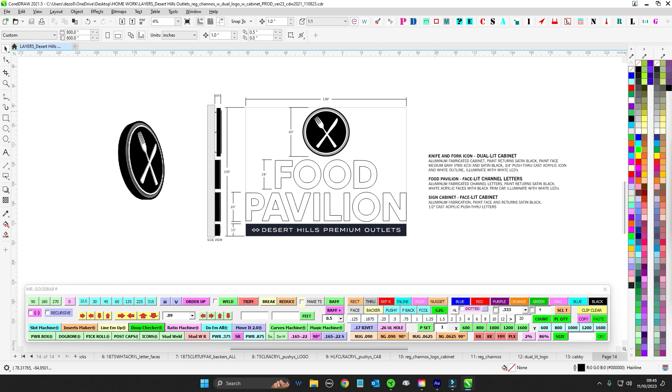Anyway, so this is for the Desert Hills Premium Outlet. This is for the Food Pavilion. They're taking down an old sign, putting up the new fresh. Old bust is out. New fresh hotness is in. So mostly I just want to go over this logo. It's got some weird processes to it, but nothing we can't handle. So let's get after it.

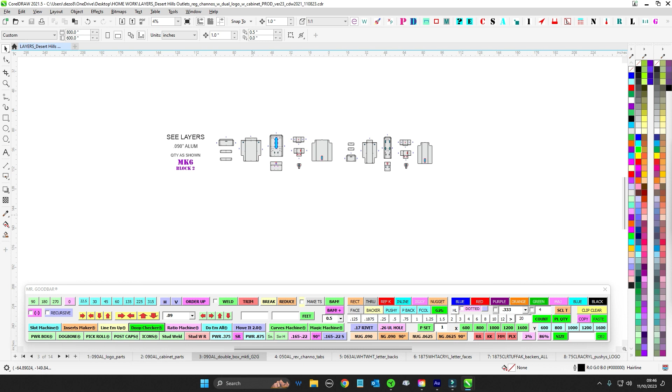So this is the lay of the land. I broke it up all 090 for the logo part. We've got double box pushy cabinet. Got all the parts there. Got a couple power vaults. Don't know how much it's going to take. We've got ourselves some custom size, weird size tabs for the logo. We've got regular channel letters coming in. So there's some 063 white and 3/16 white faces coming in.

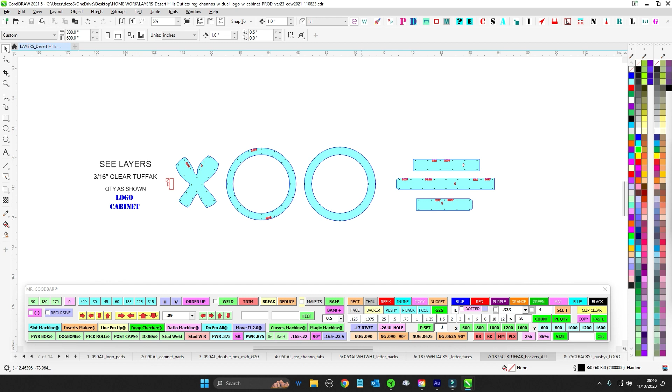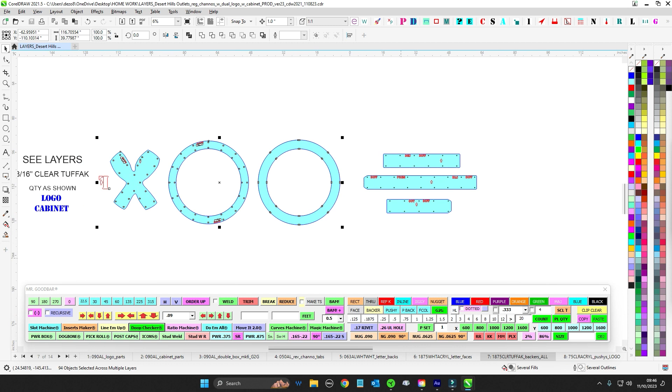I did do 3/16 clear Tuffak on all of it. So don't be like, oh, we don't normally do it that way. We do have a sort of reverse channel 3/16 thing here. Plus you'll see that the backer here sort of holds the logo together. So I wanted that strength. So this is for the logo. So since we already had 3/16 up on the table, might as well just do the cabinet as well. So yes, it is 3/16, not the usual 1/8 that we do for backers. So there's a reason why.

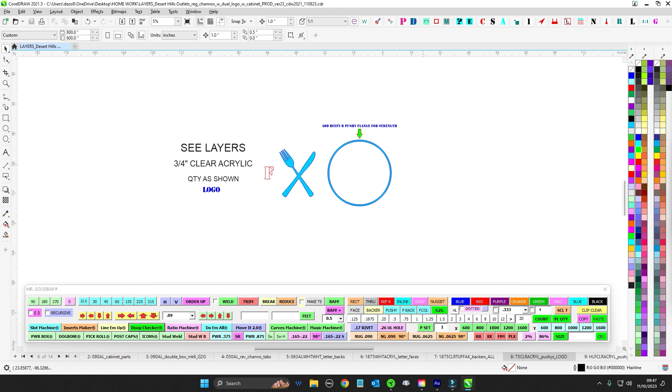And this is why, because it's going to be one big giant push through compromised face. So keep an eye out for this. You got 3/16 or 3/4 acrylic here. I'm telling Route, I want this to be a little bit beefier flange, thicker maybe, wider, all of that. And then we got 1/2 inch push throughs for the cabinet. So it's how we do. Got our pattern, all that.

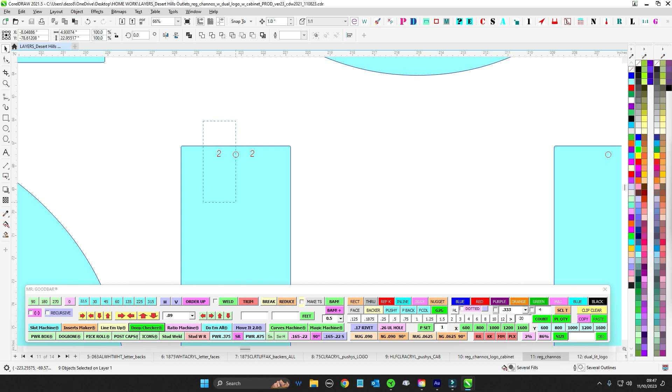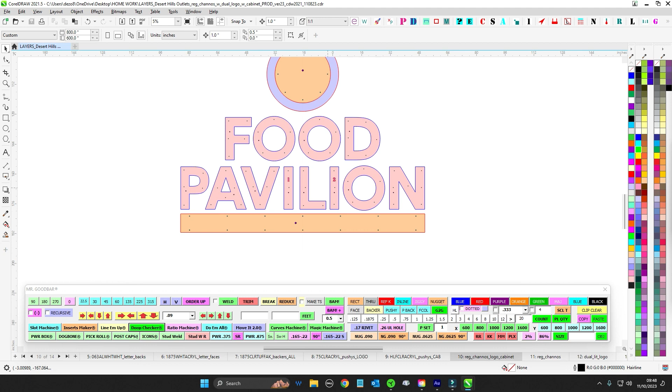Install, I encourage you to be paying attention. If you could pass this on to install, so when they go out there, they don't go, oh, this doesn't fit. So there is a number 1 and a number 2. I also did bring that along to the pattern. So when they see that at install, pay attention for number 1 and number 2. So keep that in mind. Otherwise, these are just going to be 5-inch off the coil. Pretty straightforward. Thank goodness there's no serifs.

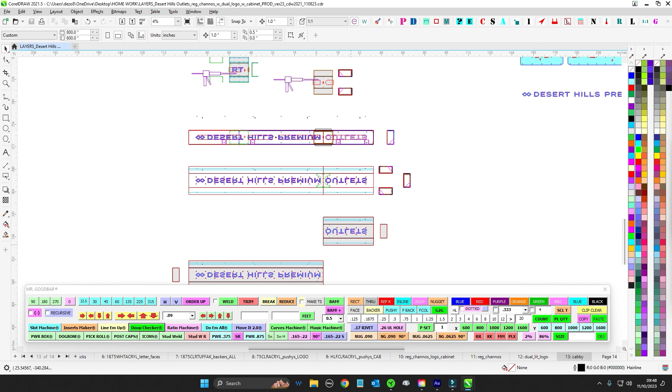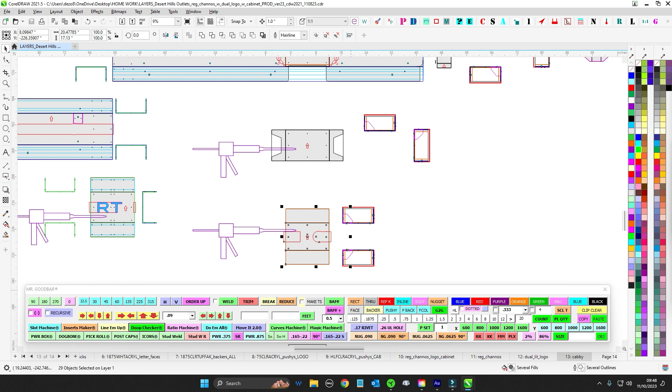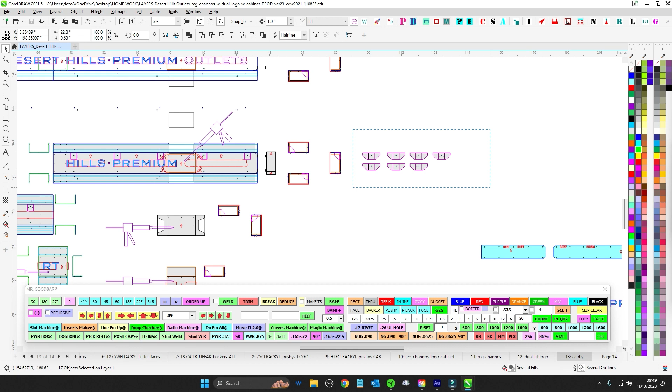I did remember to send you the wings this time. The gussets are there and they just go across the top. This thing's only 10 inches tall, so it's not that big a deal. It's just longer than we'd usually like to do it because that way it fits in the brake better. But anyway, so nothing crazy there. So you got your letters, you got your cabinet. So let's get after this logo.

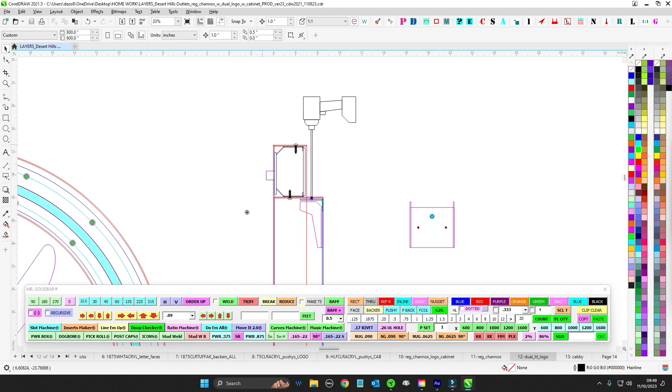So the logo is dual lit. It's going to be too big and heavy with the push through and all that, and too compromised to just be relying on a polycarbonate backer. So I went ahead and made it a sort of aluminum cabinet with the outer ring suspended. So that's why I just wanted to point that out to you.

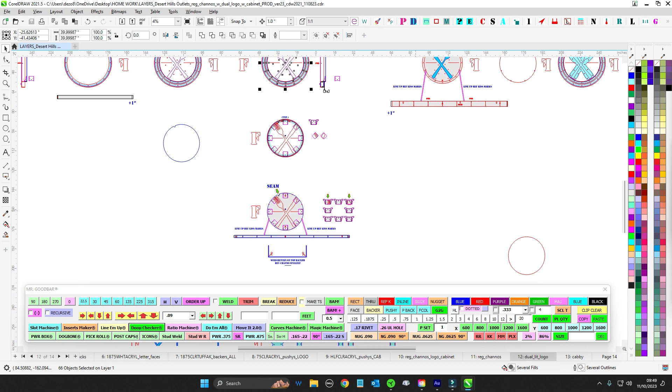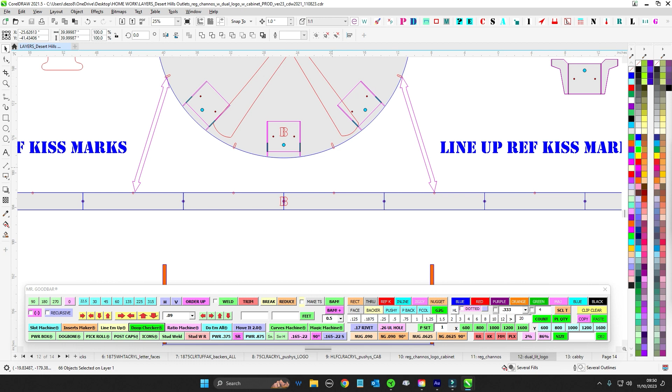We've done this before, but I have reference notches, and we want to make sure things get done in the proper order so everything lines up, because I already have your mounting holes all set up. So if this goes together like I'm planning, though no plan survives contact with the enemy, so we'll see what happens. So you start with your backer, go ahead and just run this through the slip roll, get your curl going. If you take the little reference marks and make sure that they line up with the appropriate ones, so the B is the bottom, then all of your mounting holes will already be lined up.

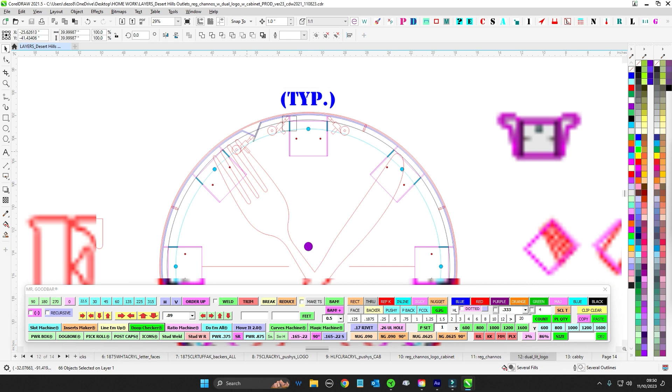And you want to start to where you got your top over here, and then you make your seam notch here like we do. So I've got a long boy and a short boy here that will overlap like this, and then you can go ahead and throw a quick weld right in there and burn it shut. So that'll be the part that goes to the wall that's ready to receive.

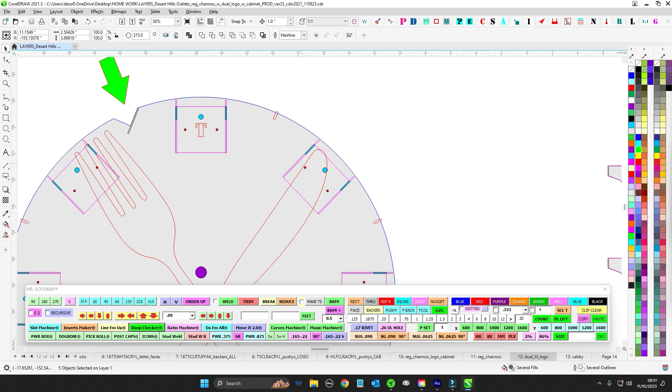And then I have the different gussets, and I went ahead and even put a little reference kiss for the fork to complete. You will have to 4x the LEDs up on there and make sure that you get an LED right here so there's not too much shadow coming out. And you'll have to put an LED up in the gusset there. But I have those right there for you just to remind you that you got to extend them.

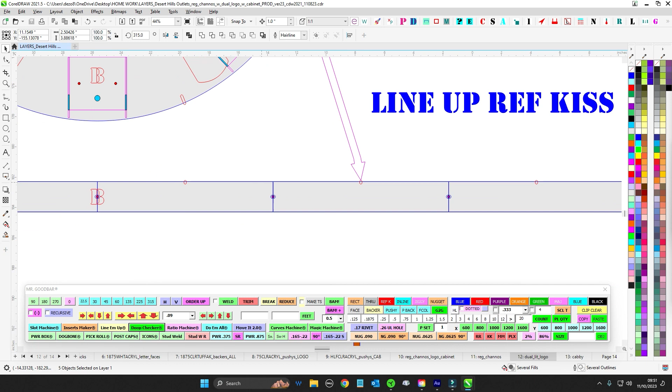These right here are just reference lines to get level for install, just to make sure that's leveled off. So you're just going to go ahead and burn that around, burn these gussets in, and then these gussets are clearanced in order to touch appropriately. They'll touch the return there, and then you can just burn those right to that, just like that. So you would just work your way around. So that way this ring is going to be nice and strong. It's got lots of strength. That way it's all good to go.

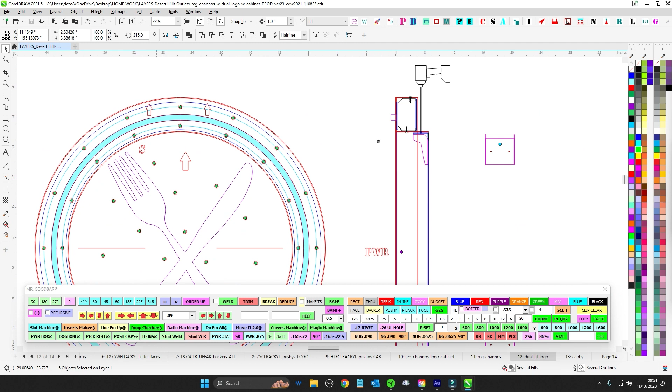Then you'll go ahead and make the actual face part. So this one's super funky because, again, it has this push through 3/4 ring that just cuts everything in half. So there's no structure. So that's always fun. So you'll have your main body here. So what you're going to do is, you've done this before, you'll just get your full return, go ahead and run it through the slip roll, and then push it to the outside of the scribe.

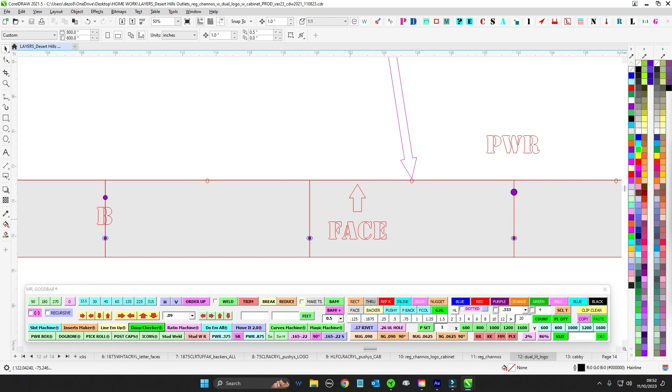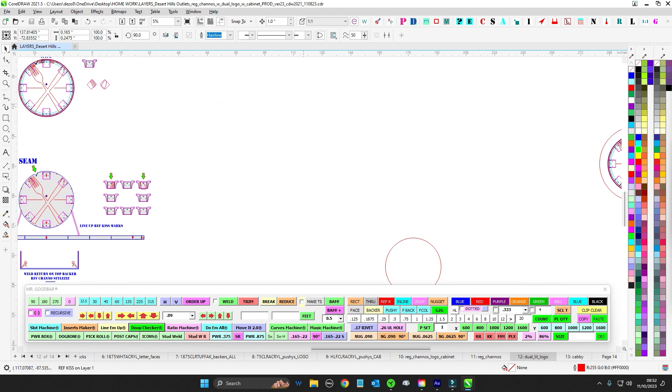And then same thing, make sure you get your bottom lined up with the bottom, and then work your way around. And these little reference kisses, make sure that they line up with these reference kisses. And then your mounting holes will all be taken care of. And then you're going to bring it around and make sure where the S is here at your 1 o'clock, or 11 o'clock, depending on which way it's flipped. That's where you're going to put your seam. And then that way it'll clearance that notch there when you slide it together. So it should be all good.

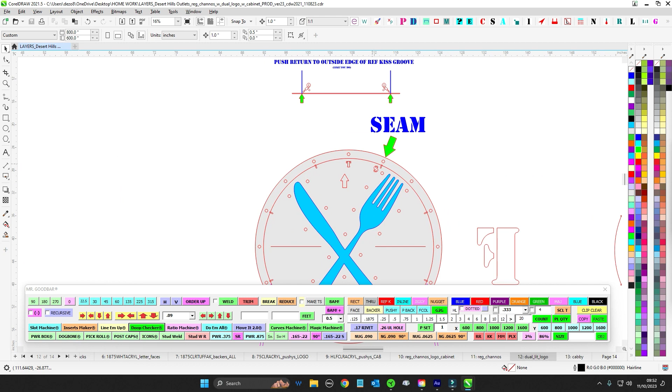So that's the inner part. Make sure that you shoot all your studs first. So you have studs on this outer ring, and you got studs on the inner part here. Obviously, it'll be very tough to get the gun in there once you get your returns. So shoot all studs first on this ring. Then just go ahead and burn it to the inside of this guy here. Work your way all the way around and secure it up. You'll be good to go. And that technically is done with this part.

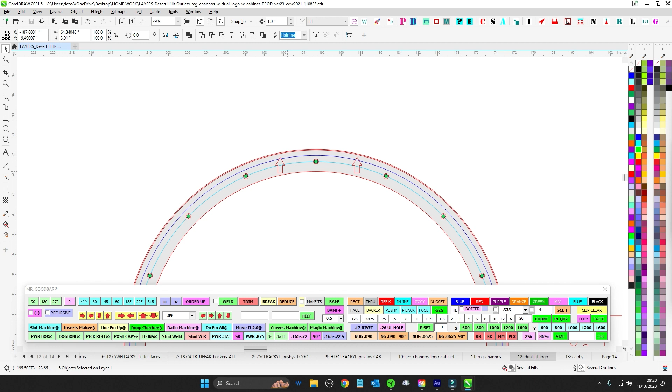Then you have the outer ring, which I gave you, your guys here. This guy here can be kind of anywhere it needs to be. I encourage you though to maybe stagger the seam between. Don't put it on a stud, and then just work your way around. I did this in 2-piece because this is longer than 10 feet. So go ahead and burn it. Gave you an extra inch like we do. That's just to the outside.

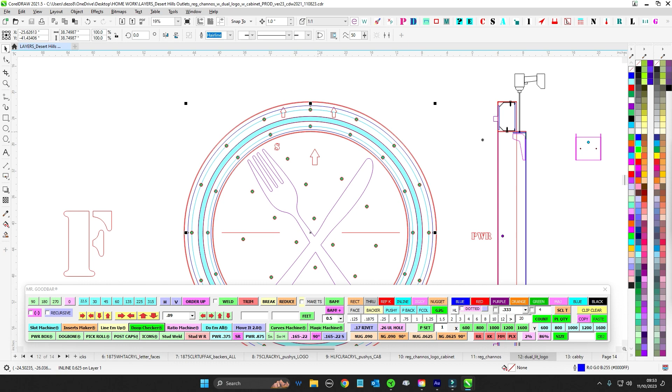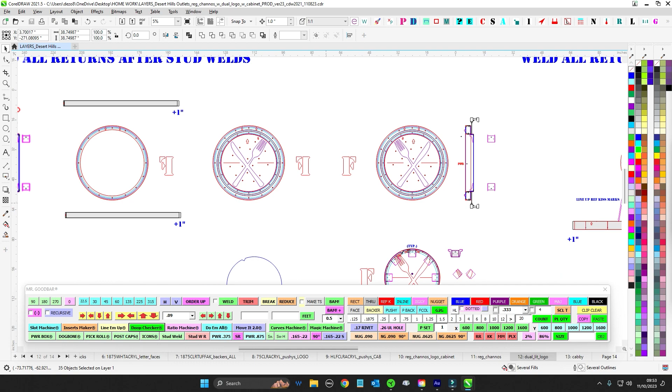Then you'll see the studs, and so this is your actual polycarbonate ring there. That is what's going to actually hold those 2 pieces together. So at that point, I think for fabrication, even before this is actually diffused and whatnot, go ahead and take this, and you're going to temporarily hold it together. And then you're going to, reverse channel letter style, go ahead and put your tabs onto this ring here.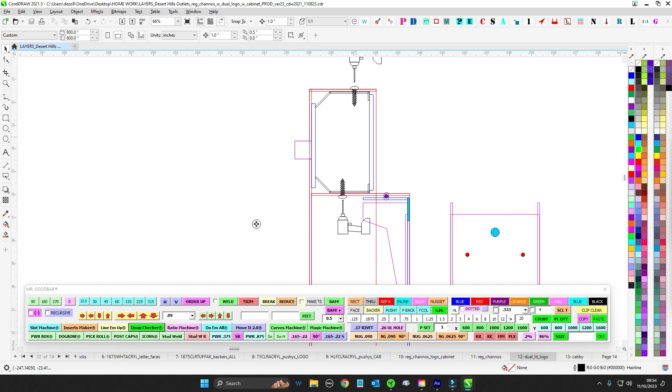And this ring doesn't have anything protruding out. Obviously, there's no mounting or anything. This is just going to hold the LEDs for the outer side. So your LEDs are going to go right here. That's going to blast your push through ring, and then you'll get your reverse glow out. So you're going to take this thing, even before the push through's through there.

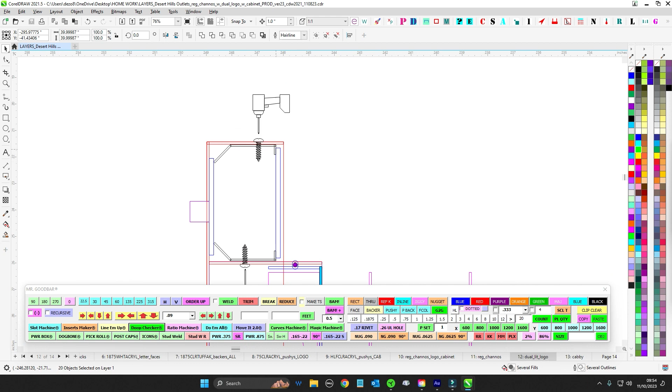I wouldn't even put it through there because this will work out. Just take this ring here, put it together so it's assembled. Flip it over onto your table so it's upside down, and then you're going to mount this ring with the screws like a normal reverse channel letter. So make these screws kind of like a normal, kind of down this way, but you'll go ahead and from

the inside, with the backer out of it, you're just going to drill holes through, but make sure that the screws are up high. Don't put them down where you normally do, because the backer is going to be there. So put these up higher, sort of in the middle like I have it here. So you'll do a thing like that and like that.

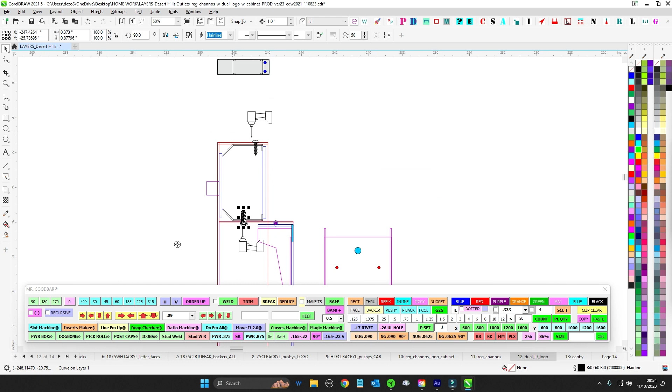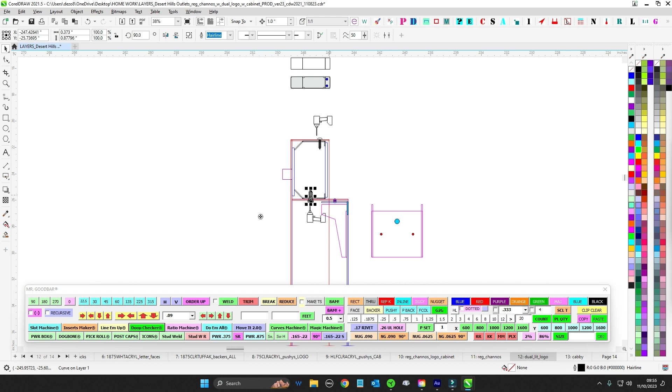I do realize that if you ever had to take this ring out, you'll have to take the whole thing off the wall, but you're going to be doing that anyway. So that's fine. I understand these screws won't be accessible, but I thought about pressure fitting that. I think we would probably want to make sure that this is all nailed down properly. It's up to you though. If you think that it doesn't need it, it's up to you, but we for sure want to be able

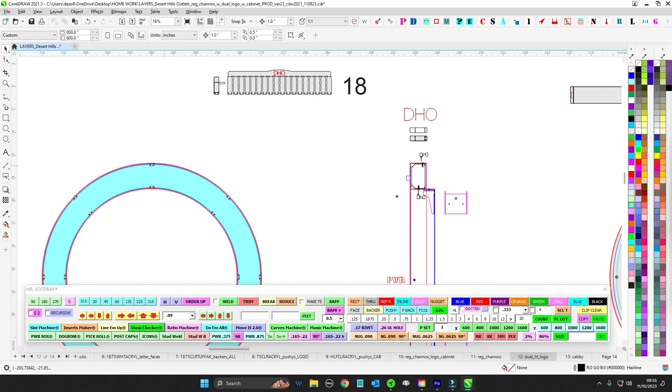to access these. So like I say, pre-mount this, put the backer, assemble this silly thing, and then go ahead and install this ring, shoot your screws, and then that should do it. I would also encourage you to make sure that it gets back to where it's supposed to. Once you have this ring in this spot, go ahead and scribe it and mark it so that way you know which way is up.

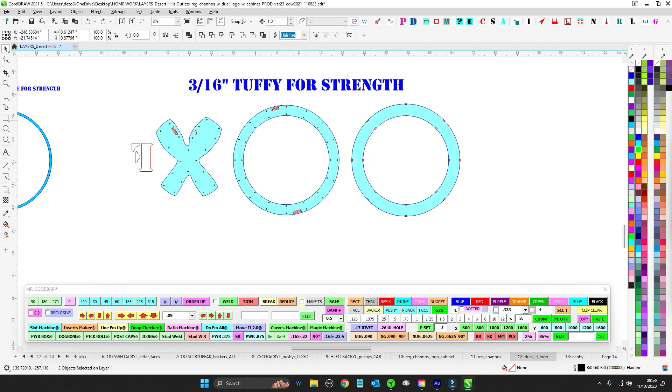Each of these holes you drill by hand are not going to be accurate all the way around. So that way you make sure that this thing gets back in its proper position. I don't have any positioning reference marks on it. You can see it's just one big ring. So you're going to want to make sure you handle that. Wherever this mounts, make sure you reference, you know, this is top, and then make sure it gets back in the same spot.

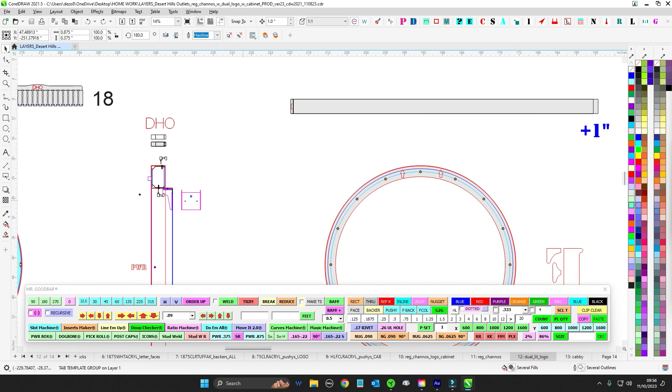I think that's it. You just go ahead and shoot your studs. You'll have that ring on there, and then assemble it, shoot these through. And then I think at that point it is ready for paint. And then when it comes time to reassembly, you're just going to put LEDs all the way around the perimeter. And then I gave you 2 power holes. They are going to be on the sides.

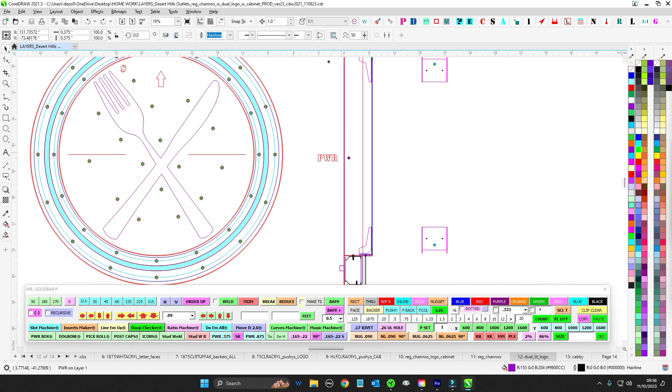So you'll have power, but anyway, they're right here and right here in the return. And they're like right there. Yeah. So the power coming in for this whole outer perimeter LEDs will be at 9 o'clock or 3 o'clock. It's your choice. And then you'll go ahead and run a long enough leash.

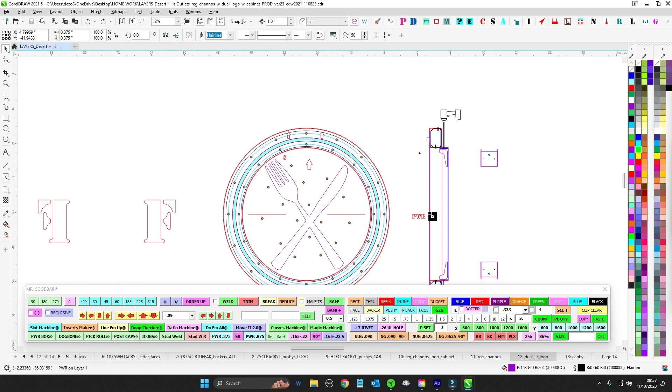I usually don't like to do this, but it's the only way it's going to happen: install will have to hold this in place for a moment, and they'll have to make a connection. Or talk to install. This might work if you make this leash long enough and just put a long old leash on there, then they can just feed it into there and push it through and then slide this on. So they don't actually have to make a connection in the field.

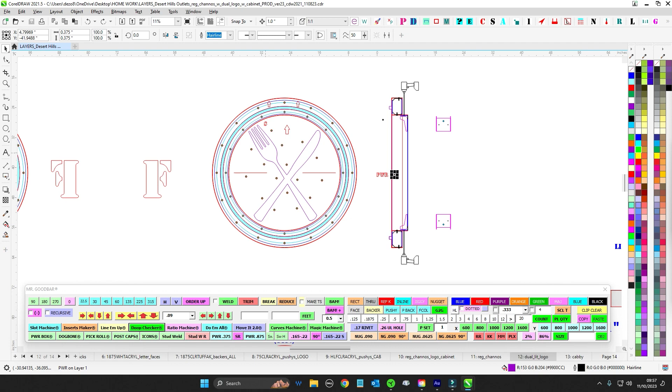Just make this leash for this outer ring. But yeah, that has to be separate. So maybe that's the way to do it. And it is clearance. It's up high enough so that the return of the backer is here. So the leash will be up here. So that's what those are for. So you can choose either 3 o'clock or 9 o'clock.

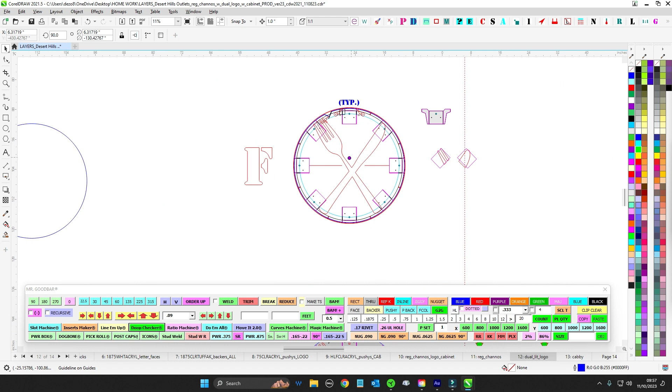But that'll probably be the best way, is just do a monster leash coming off, and then they can just feed it into the same hole as the other LEDs here and just have 2 connections going into the back. So, otherwise, I think you guys got it. Just wanted to point those few things out. Again, shoot all your studs first. Otherwise, it'd be a pain in the butt to get those on there.

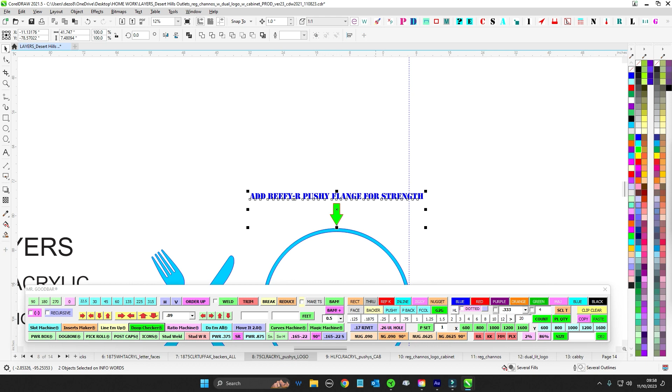But yeah, good luck. I hope it all works out. You can see why I want to make sure I get that extra flange on there. We want to make sure this is beefy, because essentially that's going to help hold the whole thing together. And just that ring there is the one that's going to hold the whole thing together. So otherwise, I'm pretty sure that's it. I think you guys got it.